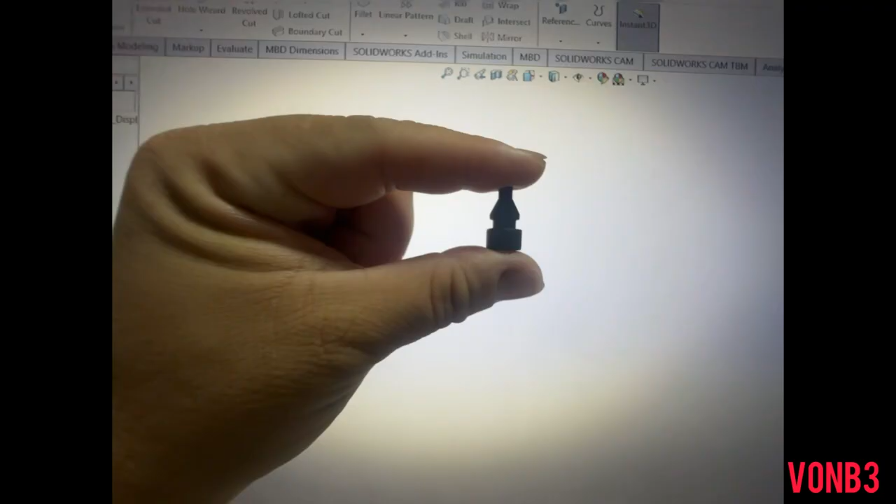YouTube, what's going on? Today we are going to make a rubber bushing for a vehicle that went down. I forgot to make an actual video to go with this to show it in real time, so I used the photos I took.

So this is what we're making, and as you can see here, we designed it in Solidworks already. All right, let's get to it.

Fire up Solidworks, click the front plane, click the line option, and right here is the origin. You're going to want to click on that, and from there you're going to go up.

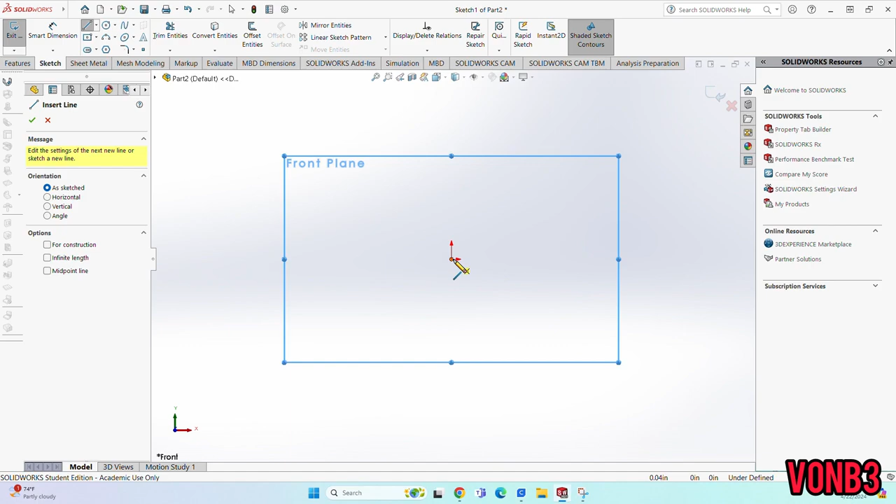Click escape, click smart dimension, and the dimension will be, after you measure it out with your dial calipers, 0.2350, green check mark.

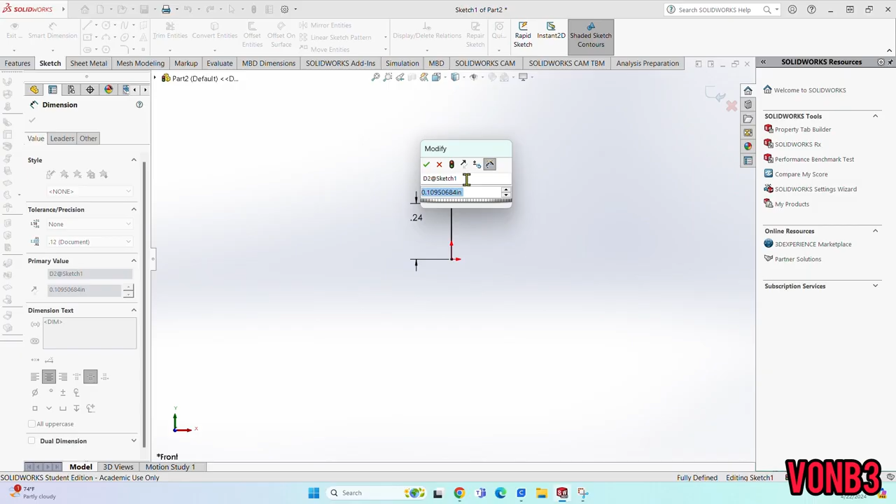Go ahead and click the line option again, click right here, and you are going to go across, and then smart dimension.

You are going to give it 0.0620, green check mark. Go ahead, click the line option again, click here, go up, escape, smart dimension, and you're going to give it a figure of 0.1035, green check mark.

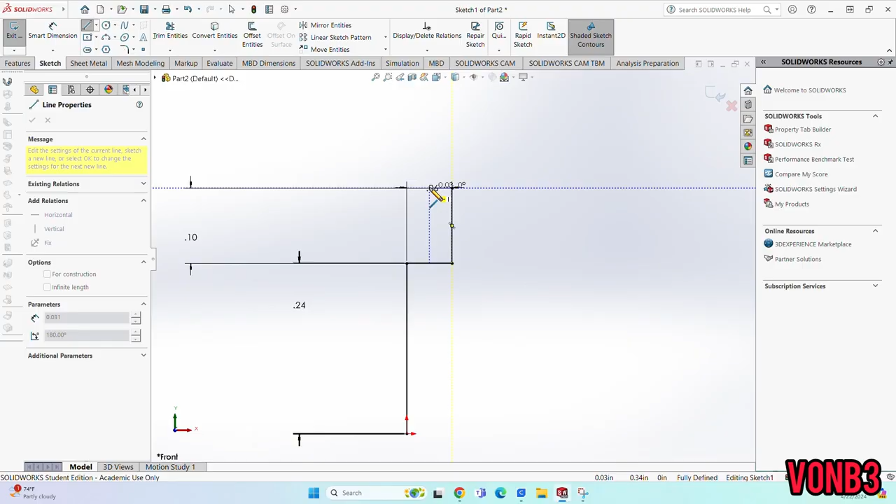Go ahead and click the line option again, and you're going to click here, and we are going to go just across slightly and click smart dimension, and we're going to type in 0.045. Press enter and green check mark.

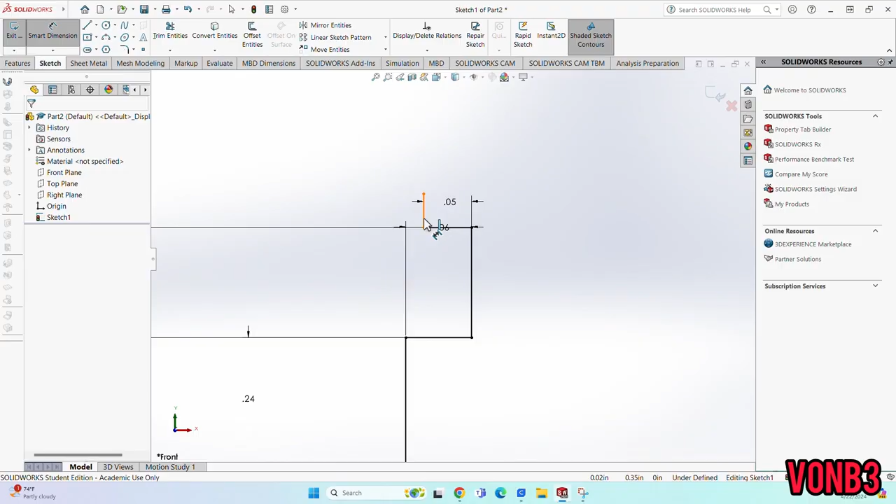Go ahead and click the line option, and you are going to click here. You are going to go up, escape, smart dimension, and we're going to go across, and we're going to give it 0.053, green check mark.

Go ahead, click the line option, click here, and you are going to go at an angle. Now this is for the cone part, and you see how it gives you that guideline right there - that is what you want. Once you have made your angle the way you wanted it, as you can see here I have a guideline, you're going to click, press escape, grab the smart dimension, and do that green check mark.

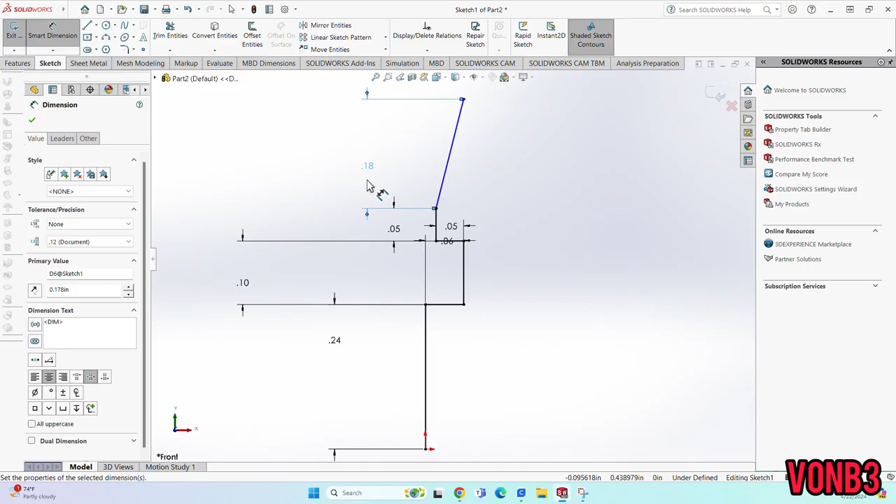Go back - there we go. And we are going to give this, I measured out, 0.1780, green check mark. All right, go ahead and click the line option and click from here. This is now the top hat.

This is now the top hat. You will just go directly straight up. Smart dimension, 0.134, green check mark.

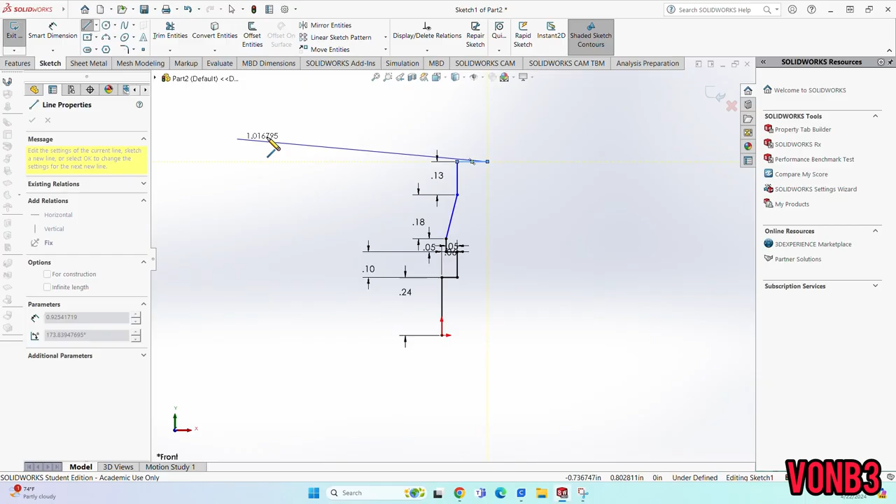Go ahead and click the line option again. Click here, and you're going to go right and escape, smart dimension, click here, and we are going to give it 0.1425, green check mark.

Click the line option again. We're going to go straight down. See where that guideline is? Literally straight down and across, and from here everything should be shaded.

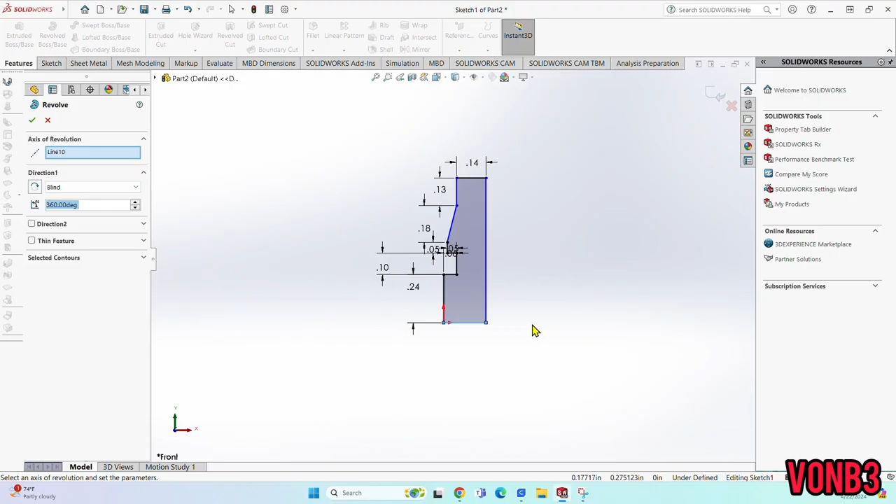Go ahead and click the green check mark, click features, revolve, boss and base, and you're going to click this line and green check mark, and here you have it, your piece.

Now I do need to do a little bit of adjusting, only because the top hat needs to be slightly thinner to match the piece that you are designing.

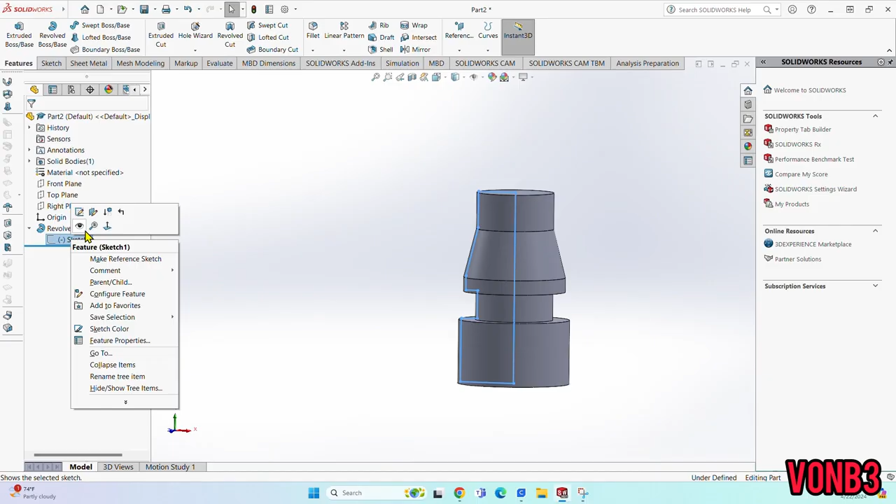With that being said, you'll right click, get back into sketch, and looking at your design, there's just a few small tweaks that you would need to make, and as you can see, I am going to fine tune it right here. All right, so right click, go back in your sketch, make sure you save your work.

I will be doing that here in a few, but always save your work at the beginning. I went back into sketch, and I'm going to refine some of this. I'm looking at it, it just needs to be a little bit more narrow.

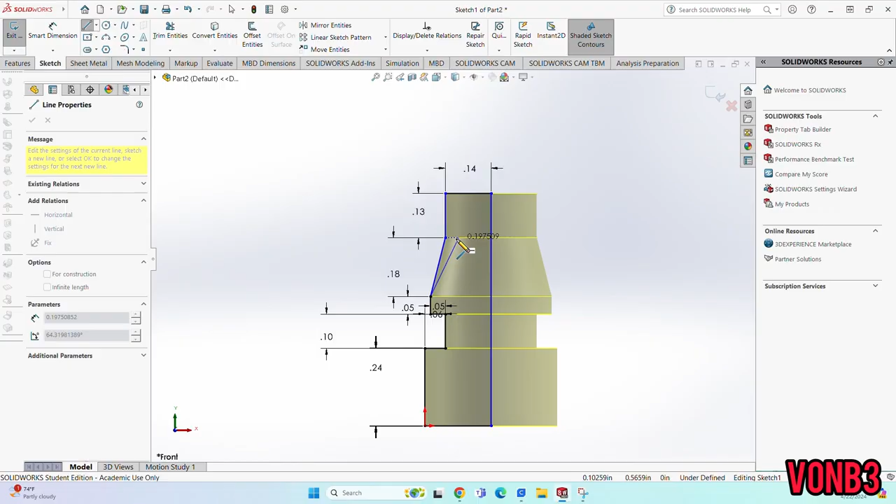So as you can see here, click the line option, clicked this point, and what I'm going to do is go in slightly more to get more of a cone-like finish. Once you have gone in at your desired angle, you can go ahead and click away.

Make sure you click trim entities - you're going to want to cut these away. Reason being is that if you don't and you try to close it, you're going to have sketch errors.

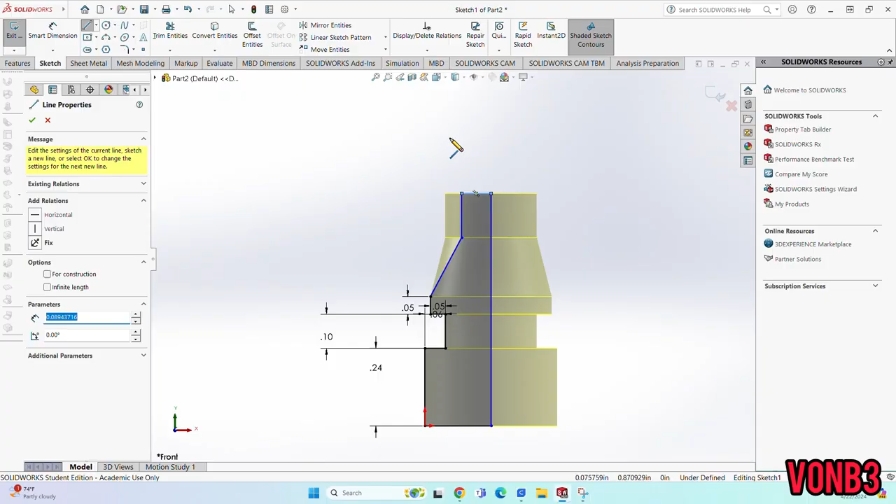Go ahead and click line option again, and you're just going to connect everything. From there, click escape, click the smart dimension, and you're going to want to get the dimensions for everything.

This dimension is good. This dimension is good as well. And the dimension for the top hat will be good as well. Green check mark, blue check mark, and now here it is, your piece.

So from here, after using your dial calipers and actually looking at your work, you should have something similar to what you plan on designing to bring to real life.

So I'm going to click the fillet option, and I noticed that on the piece it actually needs it. So I eventually took out the bottom. I ended up changing the fillet size from 0.1 to 0.01.

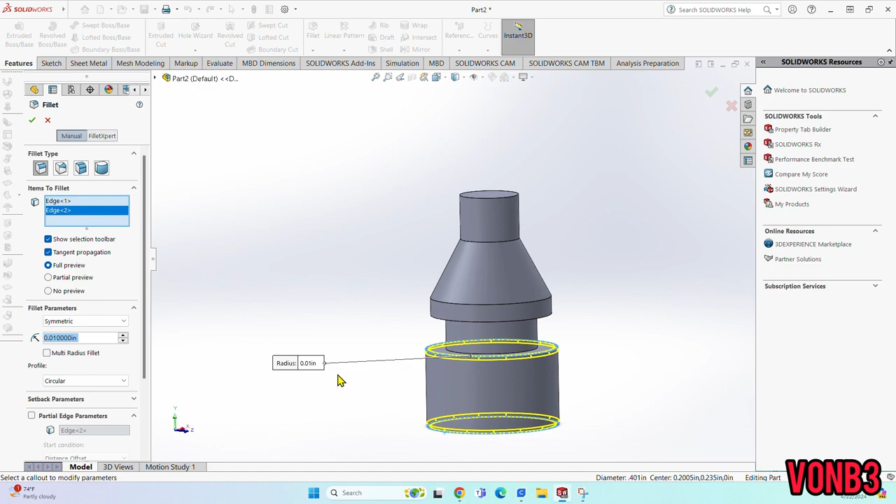I am now going to click fillet again and fillet the bottom of the cone.

So now I want to bring some life to my actual design. I'm going to click appearance and click again, and I'm going to go to plastic metal and painted. We're going to go with the black spray paint.

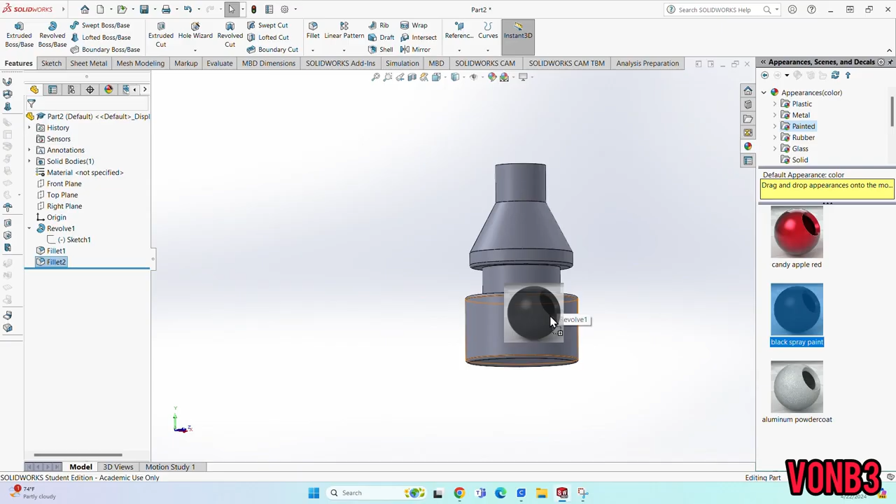You hover over it, make sure when you hover over again it has the option for appearance. You click it again, and here you have it, your rubber bushing that you designed.

And as I'll say again, make sure you save your work. You can either go to the floppy disk or you go to file, click save as, and I named it rubber bushing.

Make sure you put it in the file's location where you can easily find it. I put mine in my Solidworks training folder.

Also, if you can see here, I am wanting to see what the measurement of my piece is. So I'm going to go in tools, and under evaluate, you go under measure. I'm going to click the top to the bottom, and it should measure exactly out to what size that bushing is.

And here it is, if you can see it. And the size on it is 0.7035.

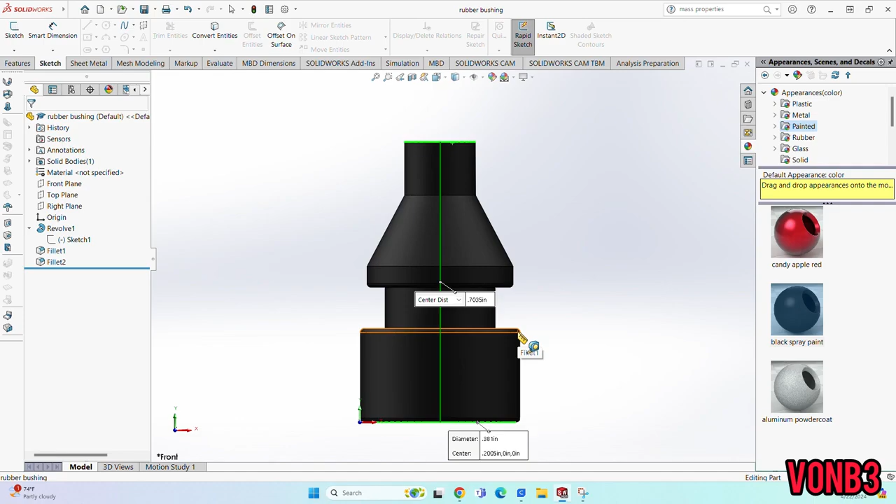If you don't have that, you will have to go back and do some smart dimensioning or remeasuring with your dial calipers. As you can see here on SolidWorks, it's 0.7035, and I have taken my dial calipers and measured out before and after, and it comes out to 0.7035.

Well, this is going to conclude my video on how to draw a rubber bushing. I printed this out using TPU. You can also use TPE, make it a little bit more rubbery, but I hope you enjoyed this as much as I did.